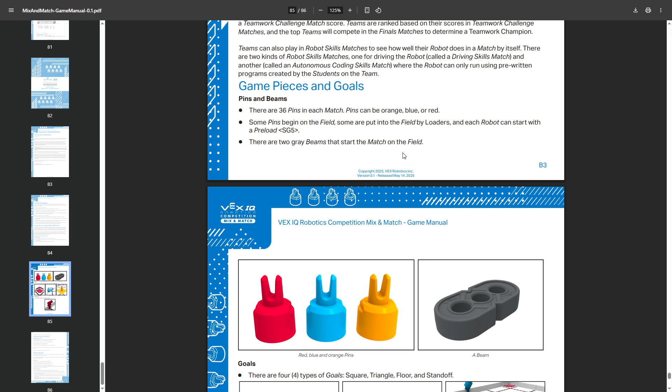I already know that, I've read this one tons of times. Vex is a student-centered program, basically don't have adults build the robots. There's 36 pins in each match, they're orange, blue, or red, and they're scored. There are 2 gray beams. So we have 36 pins, 2 beams, and 4 types of goals: square, triangle, floor, and standoff.

So there's square, triangle, floor, and standoff. They've got starting pegs, which will hold some of the pins, and you can make stacks of 2 or more pins to earn points—you earn more points. They're not telling us anything super helpful in terms of numbers here. Place stacks on goals to score even more points. I was hoping for specific numbers.

Aha, here we are, here's some cool numbers. Robots are 11 by 20 by 15 inches. Your robot has to be designed and built by students, you're not allowed to have adults, and you can only use Vex parts. There's 3 students per drive team, drive team members... let's see, this isn't super helpful down here. You can ask questions but don't argue.

Scores are added up. Alright, I feel like I've read that. That's just like a high-level game summary. This part makes sense to me.

Now I'm going to go ahead and read through these. SC rules are usually super important. These are scoring rules. It looks like they don't have any numbers in here, but just know, when we get to SC rules, I got to lock in.

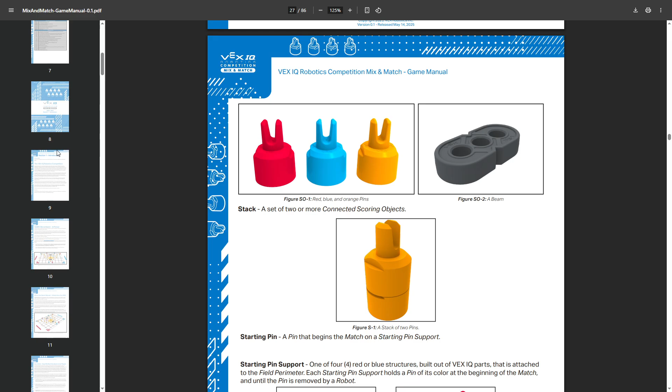This is just kind of... see, this is just kind of their intention. It looks like there isn't anything significant here. Whoa, chill, I keep clicking these hyperlinks and it's jumping me all around. There's our intents update, this is when they're going to release. So this is the one that I'm looking at just for reference. In just a few days, the Q&A is going to open, and then they're going to have some more updates probably, and by June 26th, they'll have their main version of it.

Q&A system, how that works. If you've never used the Q&A, basically if there's a rule that's unclear in the game manual, what you do is you read the game manual, make sure it's not already clarified, make sure there's not a Q&A that already answers the question, and then you say, hey, specifically R6 is unclear in this situation. Say, I'm carrying two pins and someone chucks a third pin at me, would I be in violation of this? And you cite the rule and everything.

These are like a bunch of other documents that also are binding to you. This is how you judge, this is how you qualify for competitions. This is just like protecting minors, making sure students are building the robot, all that good stuff.

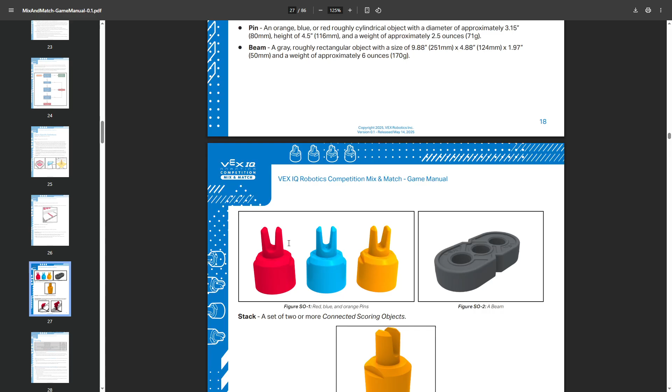Like a driver is a student team member. That was not what I was looking for, I was looking for the student. It's going to tell you about students. Where is it? Oh weird, all right let me just click on student. Basically, a student is anyone born after May 1st, 2010. Elementary school students, May 1st 2013 is the cutoff for their age, I guess.

Drive station is the region beside the field where the drivers must remain. Drivers, they drive the match, driving robots for half the match. There's the field, the entire game field. Field element is all the things. The field perimeter is the outside. The floor is the bottom of the field. The game design committee, they're the ones who made it. A physical component on the robot displays the team number.

This is just the spec of them, but that's fine. Autonomous coding period, driver control period, pretty straightforward. A robot, something that's... yeah, pretty straightforward, this is what a robot is. This is what a student is. A team - you have to have 3 students on a team now.

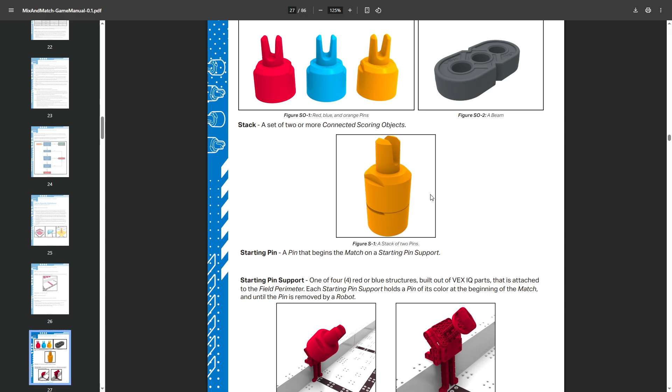Some pins start on what's called a starting pin support. And so the pin starts kind of like that.

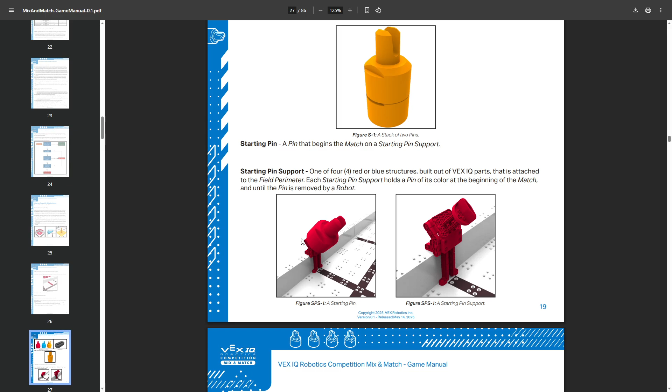And here's the scoring rules. Scoring rules are the most important in my opinion. You have to make sure that you kind of know how they work. Every connected pin is worth 1 point. Each connected beam is worth 10 points. Every 2 color stack gives you a 5-point bonus. 3 colors will give you a 15-point bonus. I think this bonus is probably going to be the most valuable of them all, just because it's not that hard to get.

Each stack placed in a matching goal or having a connected beam is going to be a 10-point bonus. Just to be clear, if you have a stack that has a beam in it and you score it in a goal, that's not worth any more points. It's still just one 10-point bonus.

Every stack that's on the standoff goal is going to be a 10-point bonus. Each cleared starting pin, so every one of these things that you knock off, is going to be 2 points.

There's a rule that says if you're touching your stack at the end of the match, it's worth no points, except it's actually worth 2 points. So basically they give you some pity points, I guess, as a like, hey, sorry you were touching your stack when the timer expired. Take this, even though it's like nothing compared to that 70-point stack you built. So that's kind of a bummer, but at least some points is better than no points.

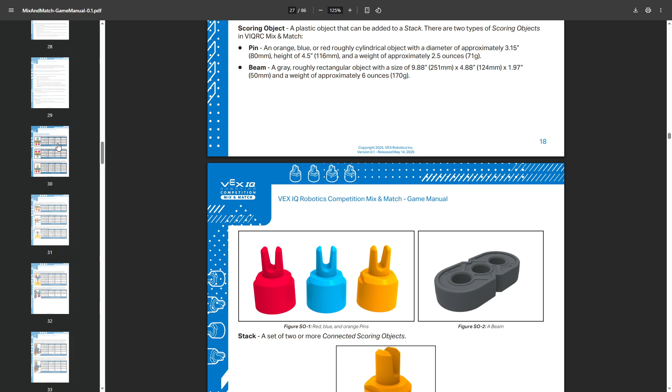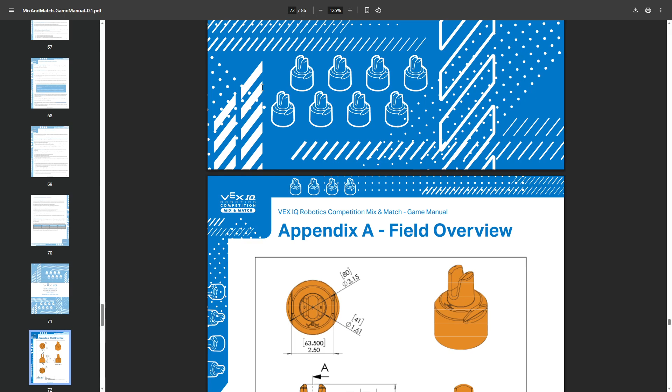This stuff is actually super helpful, but I'm not going to read it because it's just pictures of the game elements and details about what they are and how they look. For some reason they didn't include weights on these drawings. Usually you would include the weight and also the material, but for some reason this title block just... I don't know, it looks cool.

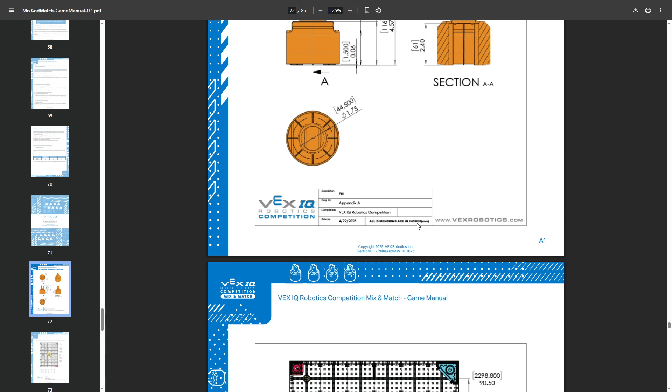Here's like, oh, fascinating — this is a standard, an ISO standard. To be honest, I'm just used to ANSI standards. I don't know why VEX used an ISO standard, since everyone in the US uses ANSI, but that's okay, they can use ISO standards if they want to.

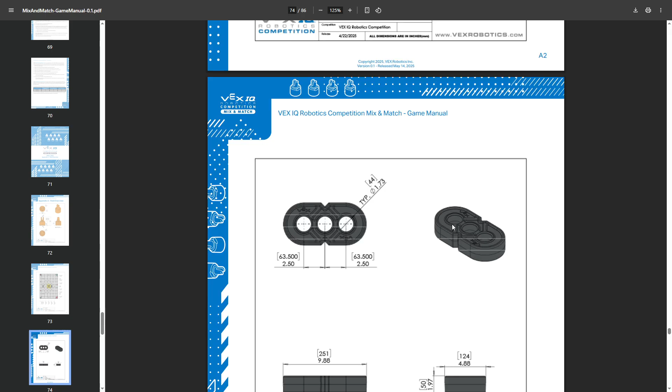That's just how the drawing looks. So this is pictures of the game elements, with dimensions if you want to build your own and don't have it for some reason. Here's the corner goals, here's more corner goals, that's the field, and then this is the summary we read at the beginning.

And that's the end — we've read all 86 pages. It was just over an hour. Good work, nicely done team. Hopefully this is helpful, and I'll look forward to seeing how this is updated and what happens in VEX IQ competition, Mix and Match.